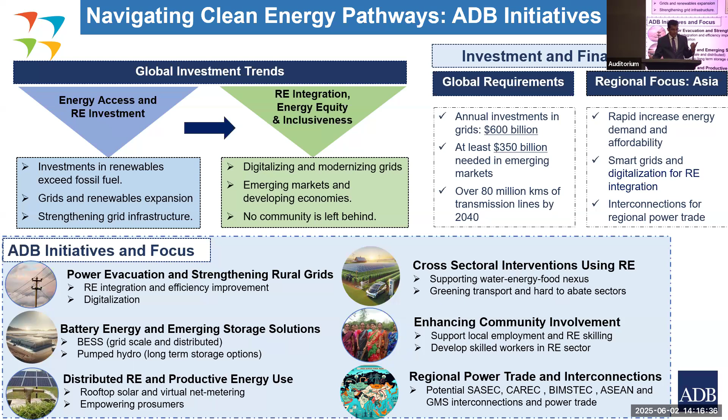Finally, regional power trade, where regions like SASEC, CAREC, and BIMSTEC can have a lot of potential for power trade. We believe renewable energy and digital solutions have the potential for inclusive development. Creating a resilient power sector together with predicting and balancing fluctuations is essential to ensure utilities adopt renewable energy, since they often find it intermittent. Smart maintenance extends equipment lifetime so we don't invest unnecessarily, helping communities become smart prosumers is key, and we also need to ensure real-time monitoring continues.

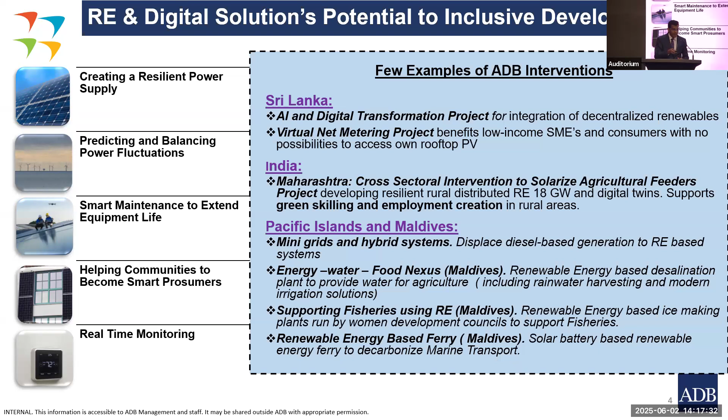There are a few examples where ADB is already doing some of the things I've listed, though I won't go into details—there's more to come. We may need to look into your technologies and solutions to adapt some of them. This is my last slide, and I promise this session will be insightful and engaging. I'd request the audience to write down any questions, because we'll do the entire presentation in one go, and then take questions at the end.

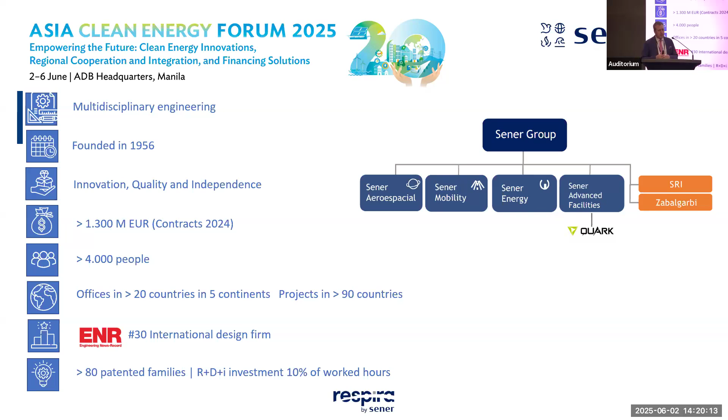So moving to Respira, I will ask my colleagues to turn on a video that I have.

Out. In. Out. In. Out. Now.

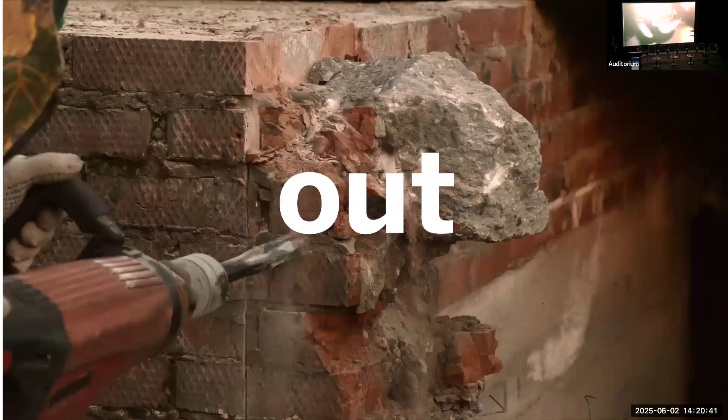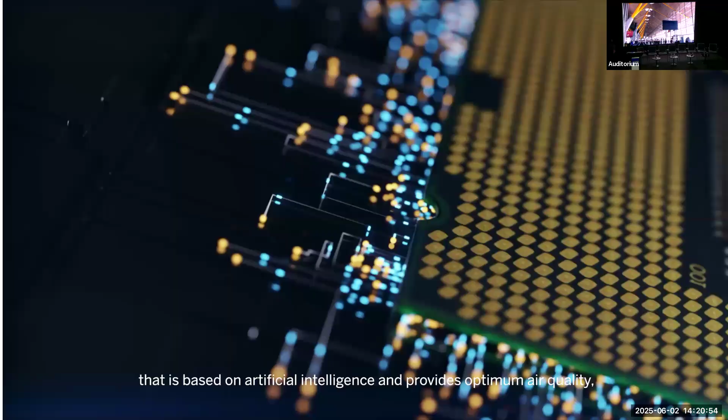Respira. Breathe. Sener introduces Respira, an innovative ventilation control system for public spaces that is based on artificial intelligence and provides optimum air quality, greater thermal comfort, a reduction in microorganisms, and maximum energy savings.

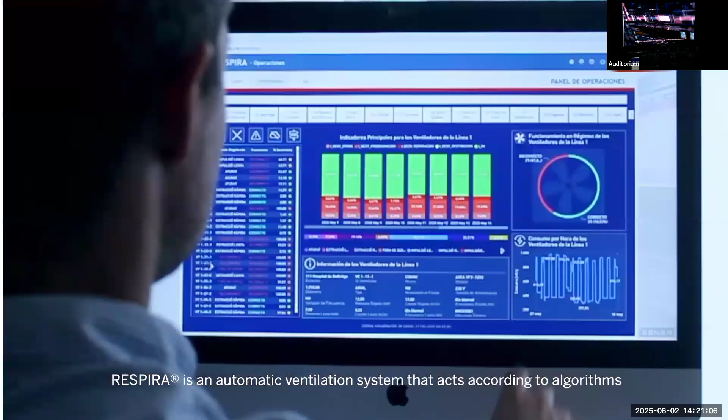Respira is an automatic ventilation system that acts according to algorithms that carry out analyses of the current and future state of different variables, including occupancy, humidity, air quality, temperature, and energy consumption.

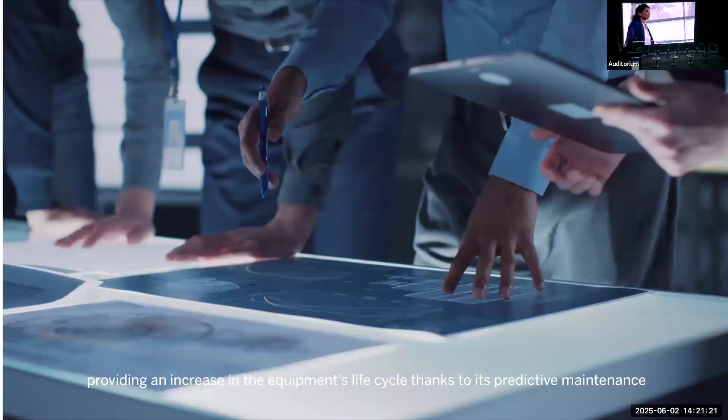Maximum comfort with minimum expense, providing an increase in the equipment's life cycle thanks to its predictive maintenance and up to a 25% reduction in energy consumption.

Respira has already proven its efficiency in one of the most daunting challenges possible, making more comfortable and controlled journeys for the travelers on the Barcelona Metro. Now we would like to do the same with the destinations.

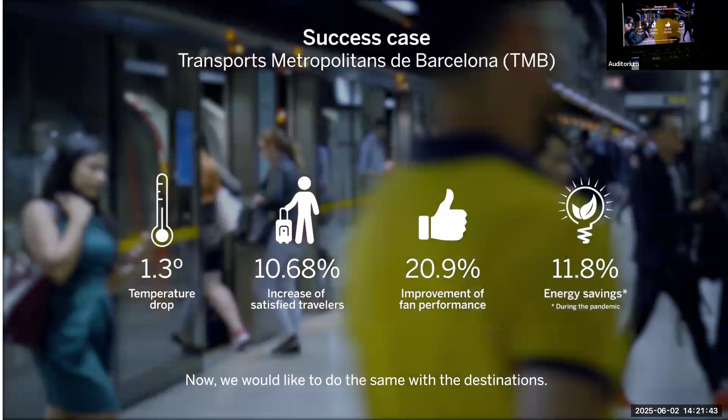Welcome to a future in which the infrastructures breathe. Buildings that rely on energy sustainability, places that use technology to improve our day-to-day lives and well-being, to make sure we never stop meeting up with one another, enjoying and living. Respira. Now breathe.

Okay, well, this is Respira. As you have seen in the video, Respira is a digital solution based on artificial intelligence that acts on three main aspects: thermal comfort, air quality, and energy efficiency.

Let me explain to you the history of Respira and how it was born. It was born in 2019, before COVID, due to the needs of Metro of Barcelona, Line 1. It's the oldest one, 100 years old. They had a lot of problems regarding thermal comfort, so they asked us to do a detailed design to improve ventilation and HVAC. We did it, and also tested this solution to improve thermal comfort.

Then in 2020 we had COVID. The main concern of Metro Barcelona was no longer thermal comfort but air quality, to detect COVID in advance. So we modified the algorithms developed by Sener to take into account air quality. Then in 2022, we had the energy crisis in Europe due to the war in Ukraine, so we modified the algorithm again to take into account energy efficiency and energy consumption, to try to save money for the Metro of Barcelona.

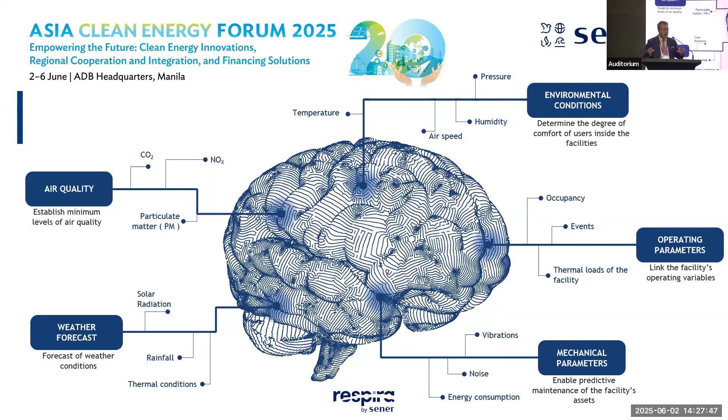The algorithm has the target to achieve the goals marked by the client, and with this, we give the instructions in real time, every second, every 5 minutes, every hour, whatever we want, to achieve these goals.

So, to use Respira, we need a BMS or a SCADA. And we are absolutely agnostic on the brand. We have worked with Schneider, Johnson Controls, Siemens — it doesn't matter. For us, it doesn't matter.

Also, we need a computerized management system that gives the instructions to all of that. Also, we can have energy management platforms like DEXMA, or PV management. All of these are always with the clients.

What we do is put Respira between all these systems, taking into account also the meteorological forecast, the electrical bills, the IoT devices. All of these are inputs for Respira to give the instructions through different protocols to the BMS and the SCADA. So Respira is not a BMS, it's not a SCADA — it's something that acts on the BMS and the SCADA.

So how does it act? The concept is we act for operation, but it's also useful for maintenance. Why? Because as we have continuous monitoring on the HVAC system, we are able to detect if one fan is not working properly. And if it's not working properly, we can give advice to our client: you have to act on that fan, for example.

And also on the investments, because we can do predictive maintenance on the assets. Why? Because we detect that something is not working properly, so we go there, we act, and then it's not needed to stop the HVAC system for some hours to do a quick repair because something has broken.

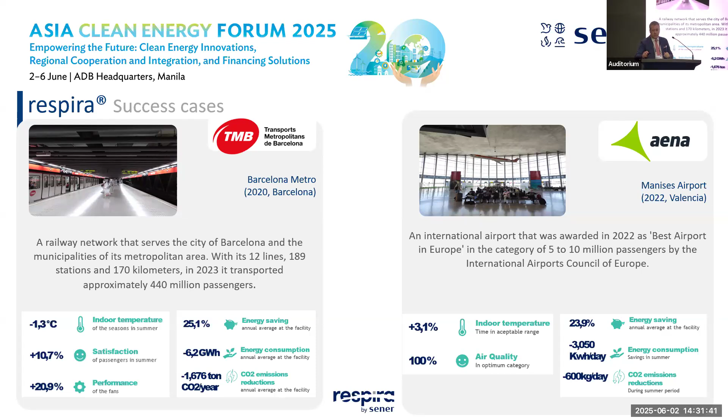More success cases: Iberostar, a world brand for resorts. We are achieving thermal comfort according to regulations close to 90%. We have reduced consumption by 5%, and it's just 1 year of working there. For air conditioning, we are saving 20% of consumption.

Fira Barcelona is one of the largest exhibition centers in Europe, 240,000 square meters. We've been working there since 2023. We are achieving 100% of the indoor temperature goals marked by the client, detecting pathogens as well. Energy savings here is 45%, one of the greatest successes we have right now.

Why? Because we know perfectly how many people will come in advance, since people check in by phone beforehand. It's not the same, for example, Smart City World Congress or the Mobile World Congress - it's not the same the first day as the last day. We know that, and we also have very good historical data. Based on that, we know people go to lunch at 1 and come back at 2, so during that hour there are fewer people, and we maximize savings accordingly. So here we are achieving 45%, and it's just two years of working - these are the savings we are having.

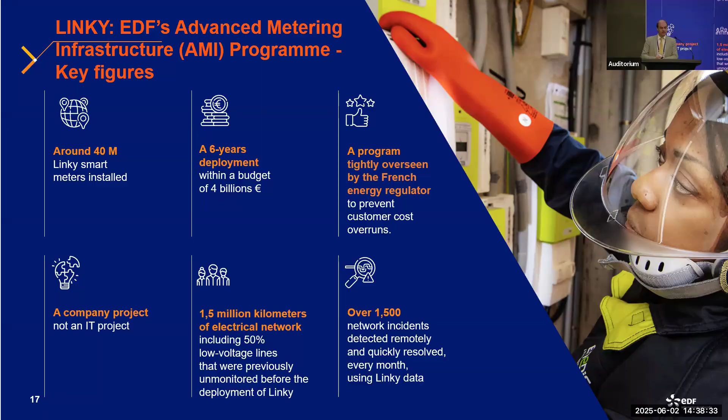So the Linky, you can see a picture of these smart meters. In fact, EDF does not make them. However, we did—

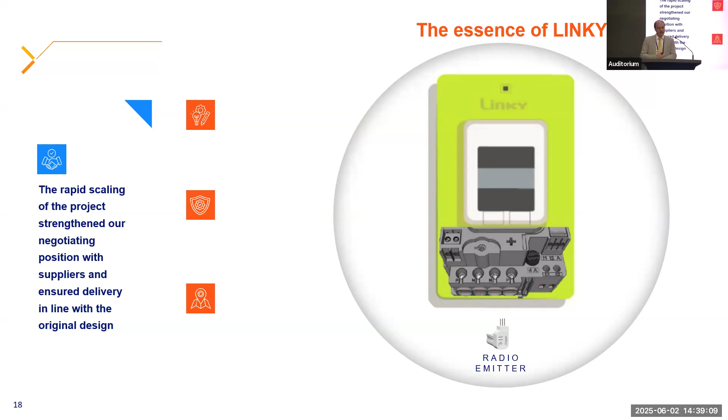Sorry, there should be some other words in there, never mind. We did specify the smart meters, the functionalities and the configuration, and they are built by 6 different companies, but they're all identical. This gives us mastery of the supply chain, and mastery of the functions. So we didn't buy these smart meters off the shelf.

So what I'd like to illustrate is the advanced metering infrastructure program, smart metering. It's a bit like an iceberg. There's a part that we can see, which is above the water, and then there's a big part which we can't see, and it's all about data.

Before I dive more into that, I'd just like to point out that, yes, there are bits missing to the presentation, but anyway, we were awarded the first place for 3 years in a row for what's called the Smart Grid Index, which is based in Singapore.

It evaluates different aspects of modern distribution grids. There are 7 dimensions, and Enedis, the subsidiary company of EDF which operates the grid in France, of the 7 criteria that were evaluated, 1 was data analysis, and we had a very strong score on this one.

Surprisingly enough, not all of the distribution companies actually use data analysis, but it's thanks to smart metering that we can do this.

So coming back to the iceberg of advanced metering infrastructure benefits, the part that we can see above the water, well, if you're the distribution company, you imagine being able to do remote meter reading, perhaps prepayment, probably reduce your non-technical losses. These are the advantages which you can see.

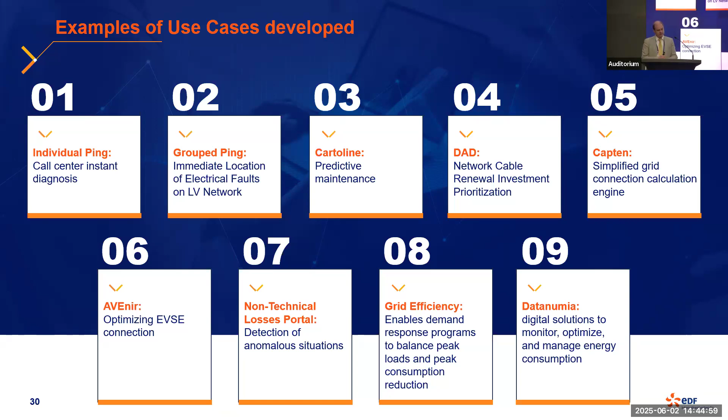We can detect anomalous situations, therefore do predictive maintenance, and so on. So all of these different advantages have been applied in France. I won't go through them all, but they all correspond to some of the advantages we've seen in the previous slide.

So really, and this is my last slide, the emphasis should be that smart metering is not just, as I said before, IT or installing hardware. It should be a transformative program. It was the case for us. It involved a lot of changes to company strategy and involved all different parts of the company. So it's not just IT, it's all the different parts of the company, and this is what you should consider. This is how you can really get benefit from a smart grid program, by using the data, as I've been saying.

So you will certainly need to restructure the way you work. This has implications for HR and training. You need to review your operational processes, which is very beneficial but a lot of work, and you need to evolve the skills. And I think I've finished.

Thank you, Christophe, that's a very excellent presentation. I agree with you that deploying smart meters is important, but how to use the data is even more important. Otherwise, deploying smart meters doesn't make any sense.

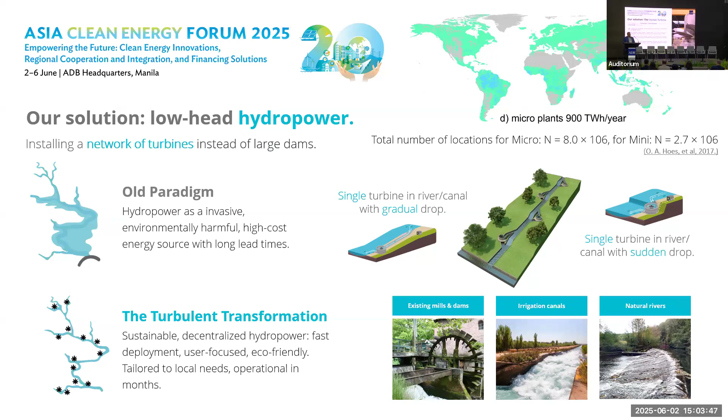Our solution, completely designed and produced in Belgium, is low head, as I said. We start up with 1.5 meters of head, and we only need 1.5 cubic meters a second of water. It can be placed on grid, off grid, or both. We work as it's based on hydro, 24 hours a day, 365 days a year.

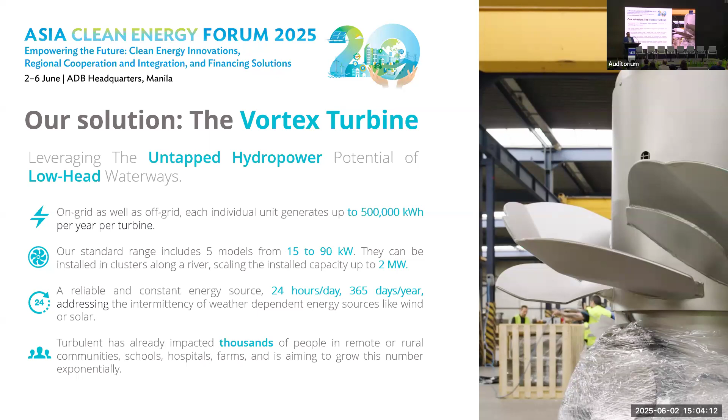As I said, designed and made in Belgium by us. It's produced almost in Leuven, very close to our factory, completely made in stainless steel. The cabinets are tested and produced in our workshops as well. It's installed always on site by the local partners.

We don't send out our own people, we always work with the locals. Like you see on the picture here, it's a project we have done in Kenya. We work with more than 100 people over there, creating employment as well.

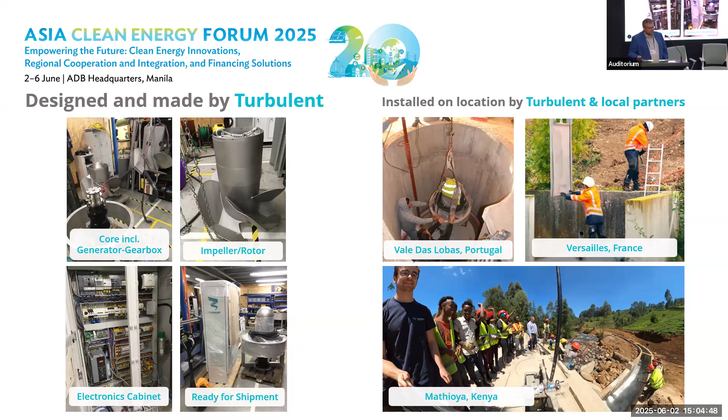Who does it? The people you see. At this moment, 15 people in Leuven, more than 100 people in the workshop.

How does our technology work? As I said, we take the water. By using a bypass, we don't install it into the rivers. We use the water, drop it down through our turbine, and give back the water to the river. That generates electricity. We have 4 or 5 types of turbines, starting at 15 kilowatt up to 90 kilowatt.

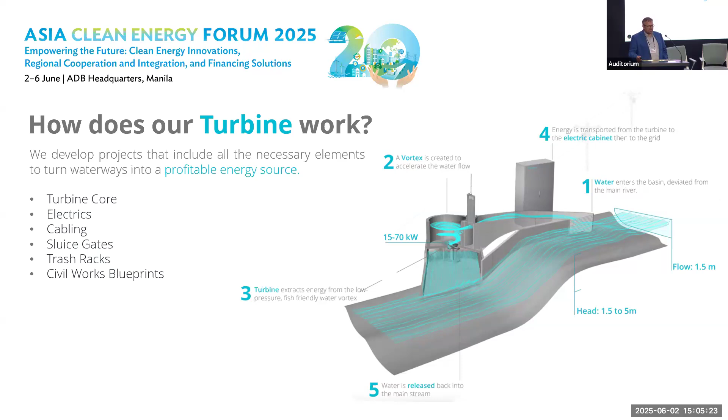At the end, it's scalable, modular. We can place them parallel or in series up to a few megawatts if needed. A little bit into technical detail, kindly to see, but if it's needed, ask me some questions afterwards.

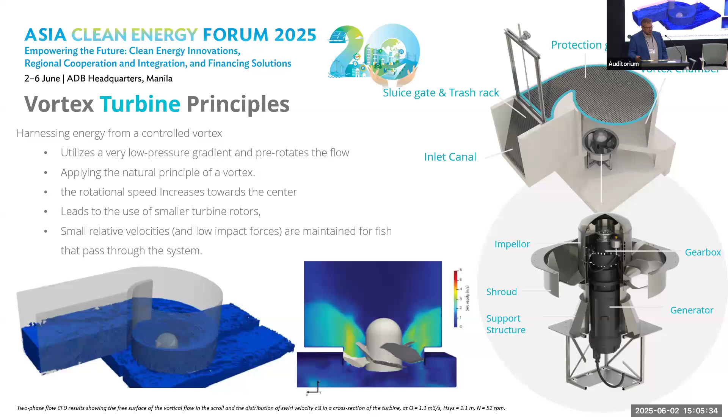Where are we on the scale of hydro? Are we competition to the big ones? No, not at all. We are not like a Francis turbine, we are not like a Kaplan turbine. When there's a use for them, please be free to use it. We go low head - starting at 1.5 meters of head and with low water.

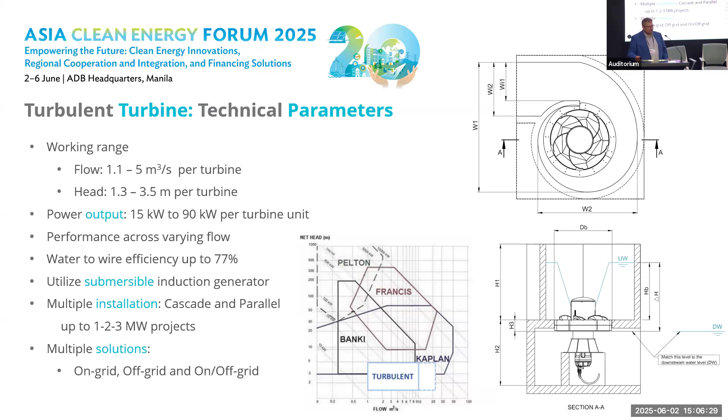If there's a community that needs 100 kilowatt today, we will install 100 kilowatt. If the economy is growing over there, okay fine, let's install a second one a year later.

Our advantages: the technology is cost efficient. We start at the levelized cost of energy, in this case in the Philippines, at 2.5 pesos a kilowatt hour. So it's economically viable, with payback time of 4 to 6 years.

We are fish friendly, tested in the UK on several kinds of species. What is the difference with other hydro? Our trash rack has openings of 10 centimeters. That means whatever passes - I don't call a fish trash, but even a fish smaller than 10 centimeters will pass the turbine without being hurt.

As I said, the levelized cost of energy is 2.5 pesos a kilowatt hour.

And this is a nice one: when you need solar - very popular worldwide and a good technology - you need one soccer field of solar panels to match one of our turbines, the same capacity of 70 kilowatt. This is the impact on the area - one soccer field instead of a third of a piece of the goal.

Maintenance costs are very low. You start at the beginning with the installation. One time a year, you need to change the oil of the gearbox - it's like changing car oil. 3 hours a day, 2 people, one time a year. That's it.

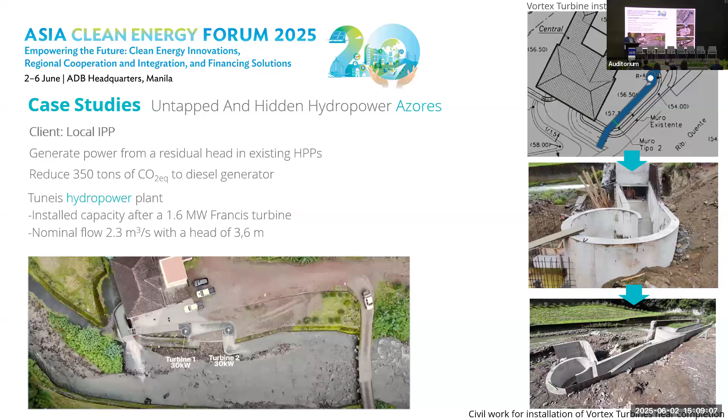Small hydro, as I come to say, this is a 15 kilowatt installation, but for small municipalities all over the Philippines, all over Asia, it's more than enough to make some people happy.

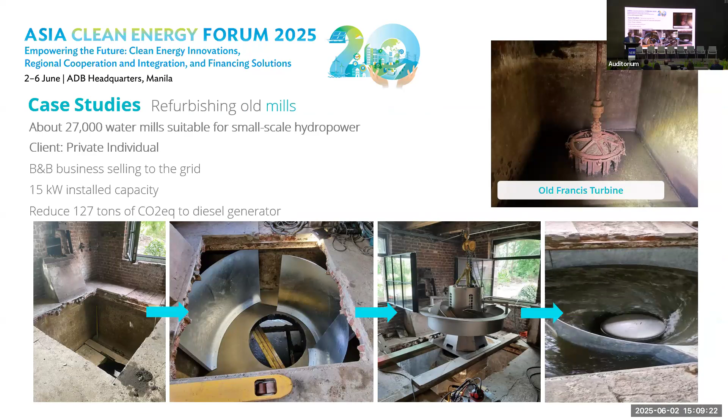Recognized globally, last year we won the World Economic Forum World Impact Award. Very proud of it. We are supported by the universities in Belgium, by the European Union, and very much by the Belgian government.

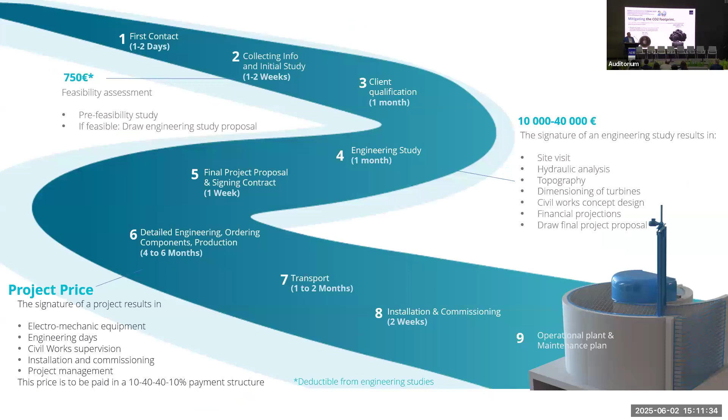That's what you came to see here. Okay, a little bit exaggerated, but anyway, you see the point. This is the scope when you enter with us. And I want to say thank you very much.